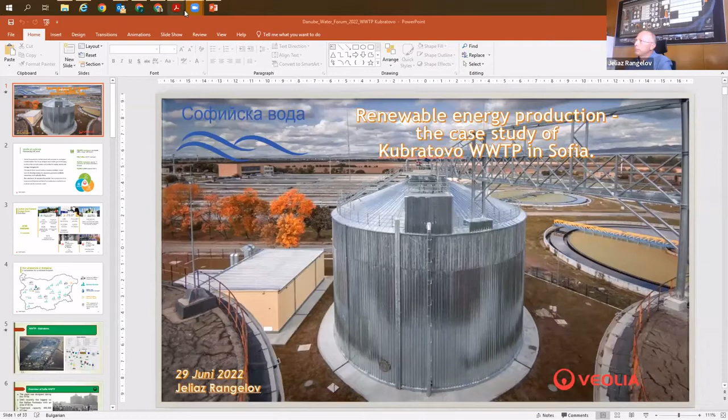So, hello everybody. Is it okay with the screen sharing? Looks good, thanks.

Let me first introduce myself. My name is Jeliaz Rangelov, and I'm working in the field of wastewater collecting and treatment in Sofijska Voda, which is a part of Veolia. I'm working now at Sofijska Voda more than 10 years in this field. I have a lot of slides, but don't worry, I will go briefly through most of them and stay on the important ones.

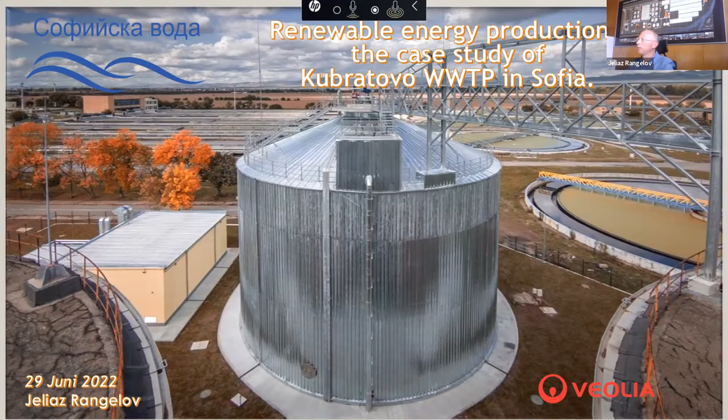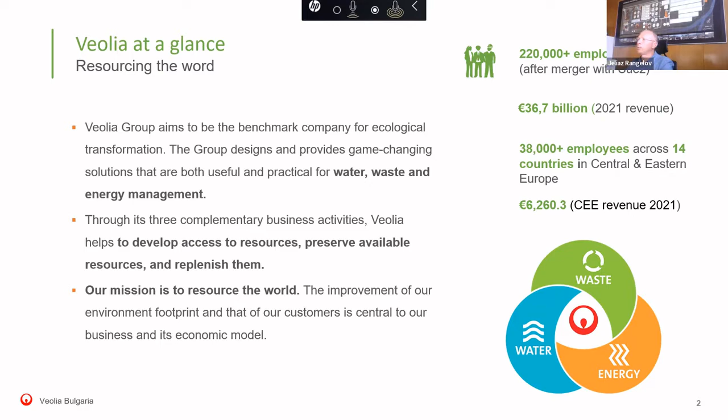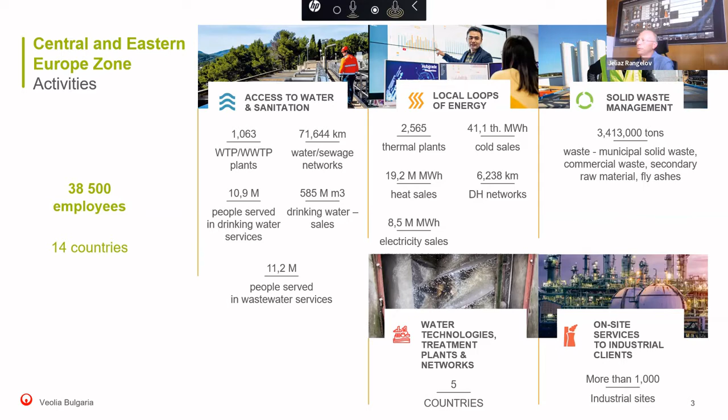First, a brief introduction of Veolia. Veolia is a leading company in the utility sectors, working in the fields of water, waste, and energy management. We have more than 220,000 employees worldwide after the merge with Suez. In the Central and Eastern Europe zone, which Bulgaria is also in, we have business in 14 countries. In Bulgaria, we have technical services in smaller cities, a heating company in Varna on the Black Sea, and the municipal water and wastewater in Sofia, which is the main and biggest business of all in Bulgaria.

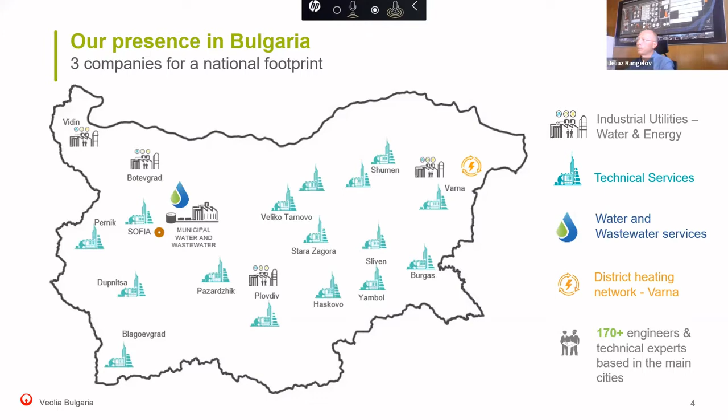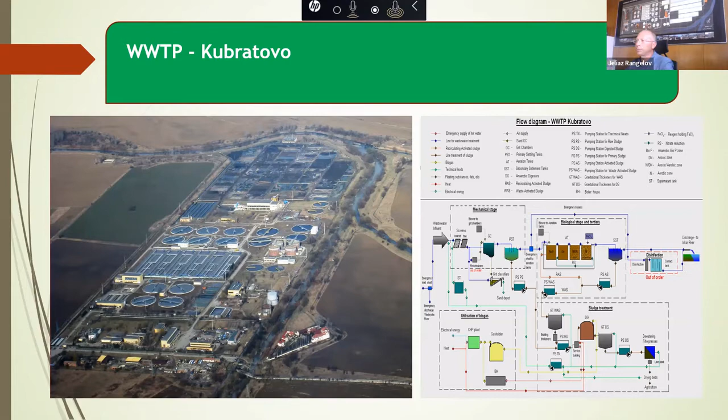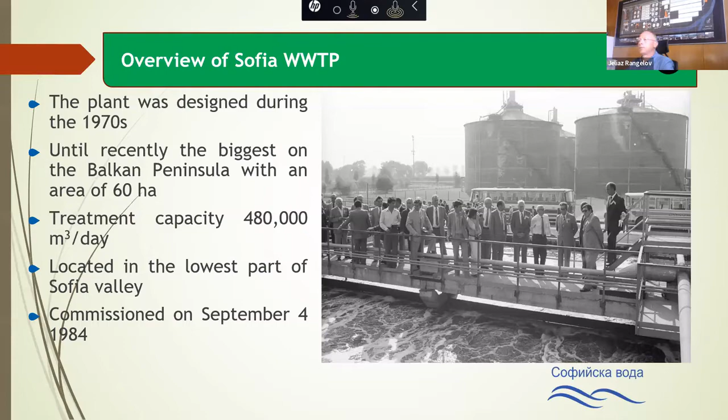Let me introduce the Kubratovo wastewater treatment plant. This is how the plant looks like. It was designed during the 1970s, and until recently it was the biggest on the Balkan Peninsula. Now the plant of Bucharest is bigger than Sofia's, but it's also part of Veolia Water. The treatment capacity of the plant is about 480,000 cubics per day, and it's located in the lowest part of Sofia Valley. This is very important because all the sewage system of Sofia is by gravity, and the water is flowing through the plant also by gravity - we don't have a pumping station. The plant was commissioned in 1984.

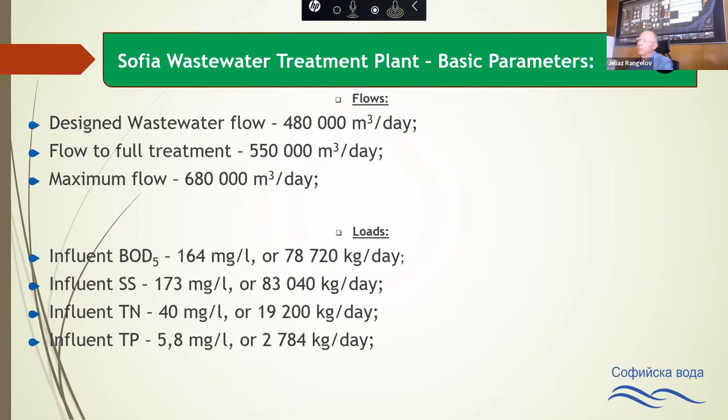These are the flow parameters. We can treat a maximum flow of 680,000 cubics per day, and these are the loads for the most important pollutions.

We had a lot of reconstructions over the years on the plant, from 1996 to 1999 we had a project for reconstruction of the sludge treatment facilities. 2002 till 2004 was a reconstruction of the water treatment line. In 2006, a very important year, we finished the reconstruction of the sludge treatment facilities and started operation of our digesters. In 2009, we installed the CHP plant. 2010 to 2011, we reconstructed the biological line again and implemented the third stage of treatment, so we also treat nitrogen and phosphorus. In 2019-2020, we built a fifth digester - it was the biggest project of Sofijska Voda done for this year.

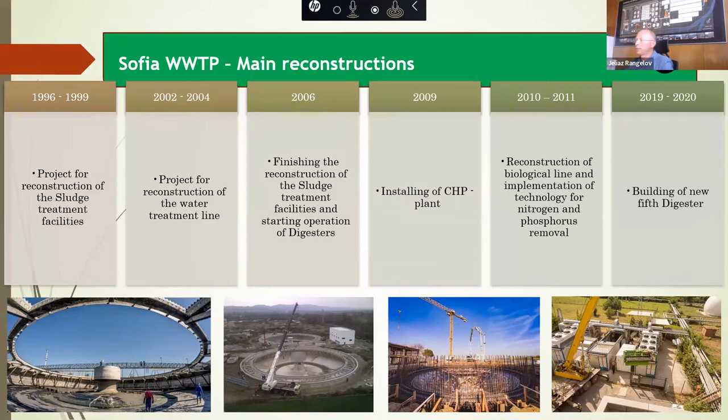We have, of course, a SCADA system, and this is how the SCADA of Kubratovo looks like.

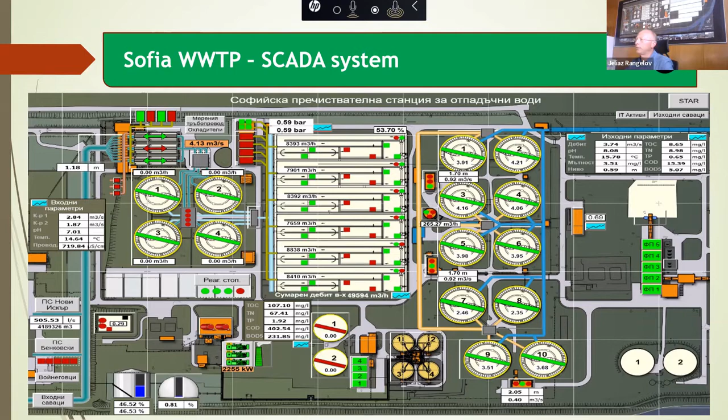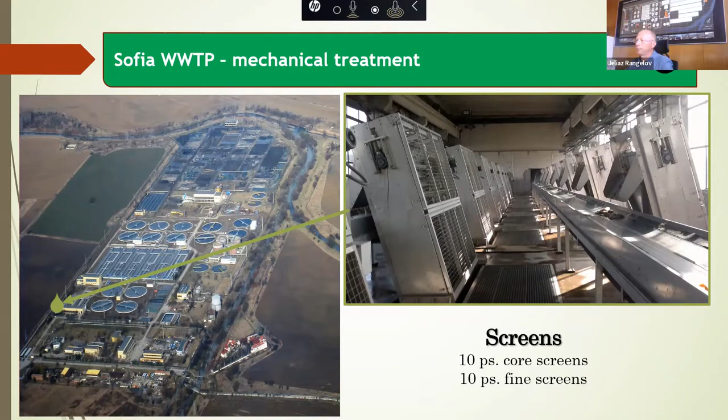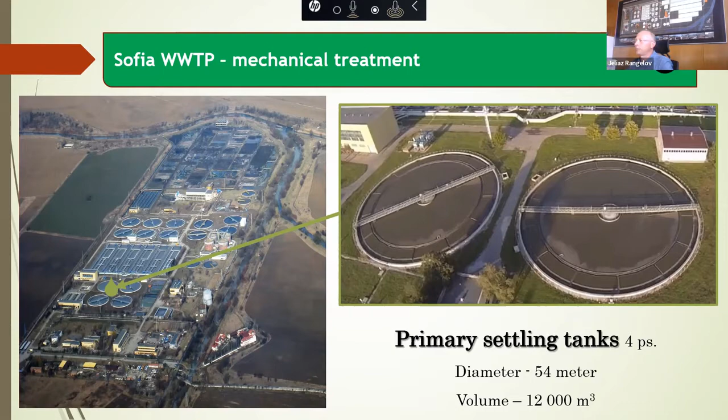A brief introduction of all the equipment in the plant. We have 10 channels with 10 coarse and fine screens. Then the water goes to sand and grease removal - we have 3 lines for sand removal. After the sand removal, the water goes to primary settling tanks, 4 pieces with a diameter of 54 meters.

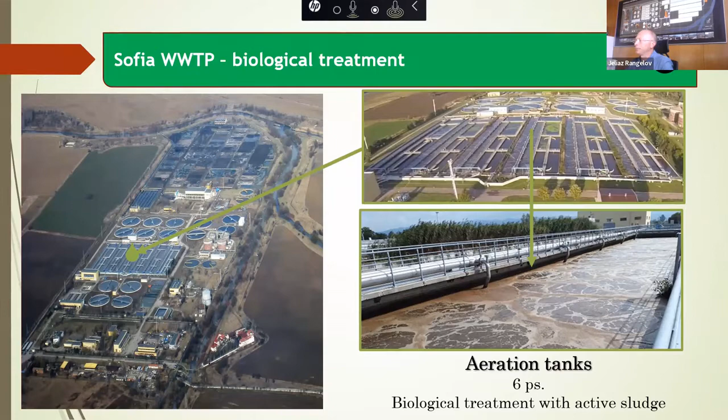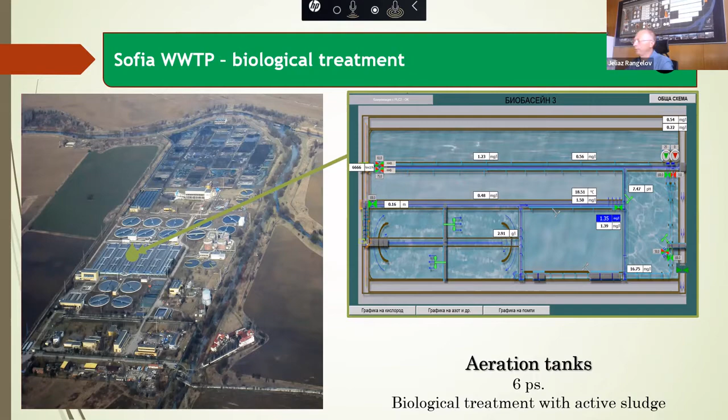After the primary settling tanks, the water goes through the heart of the plant, the biological treatment. We have 6 lines working with activated sludge, with a lot of measurements and automation in the biological step. After the biological treatment, the water flows through 10 secondary settling tanks - the same as the primary settling tanks, just different in number. We have 3 pumping stations for the secondary settling tanks.

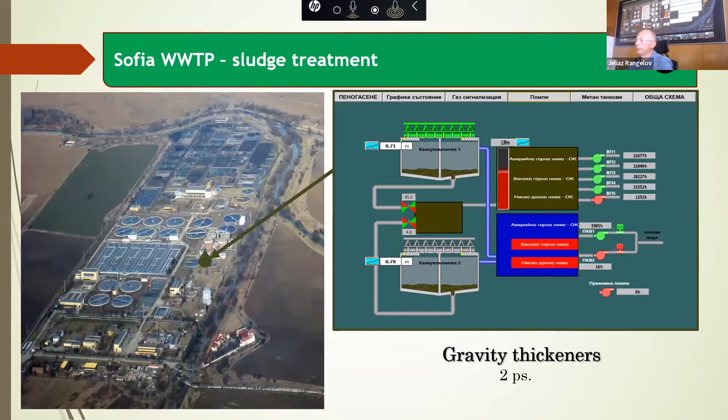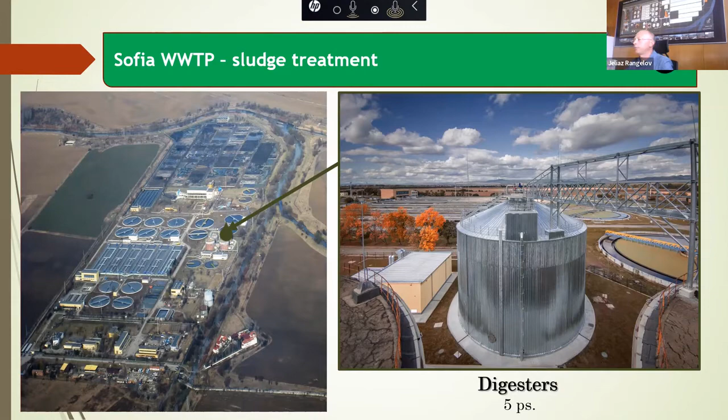This was the water treatment line. We divide the tanks into the water treatment line and the sludge treatment line. The sludge from the primary settling tanks goes directly to the digesters, and the activated sludge goes first to 2 gravity thickeners, then 4 mechanical thickeners, and then the mixed primary sludge and activated sludge goes to 5 digesters.

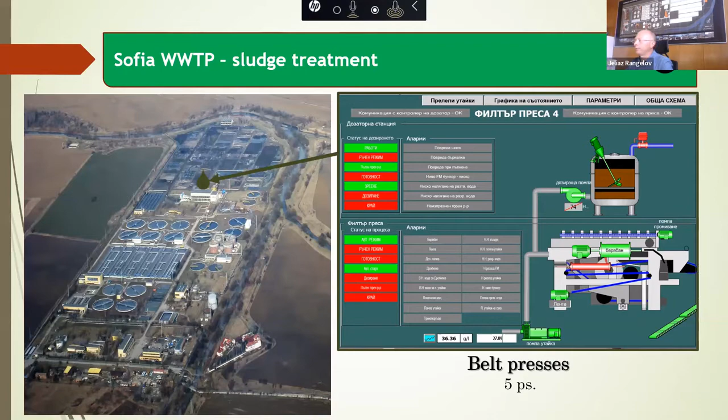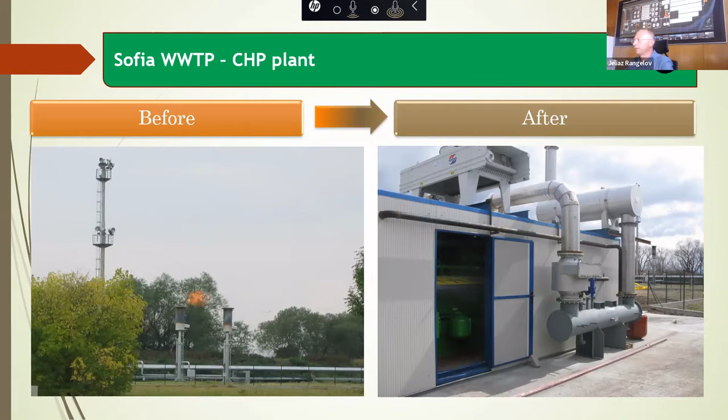The end of the sludge treatment process is the dewatering of the sludge - we have 5 belt presses. And of course our CHP plant. Before the plant, we had a lot of biogas that we couldn't use in the boilers, so we burned it on the flares. After that, we have our 4 generators.

From 2011, we are very focused on energy efficiency. We did a lot of CapEx projects for increasing our energy production and decreasing the energy consumption of the plant.

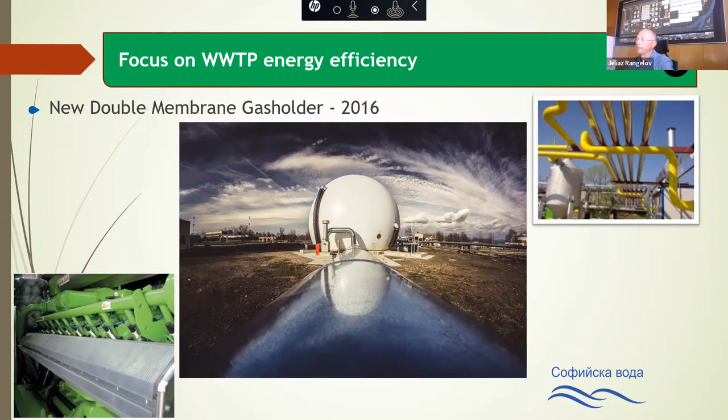In 2016, we installed a new gas holder. The main reason for installing the gas holder was so we could overhaul our existing, bigger gas holder. The useful volume of the new one is about 1,000 cubics, and the pressure inside is about 35 millibars, like the system.

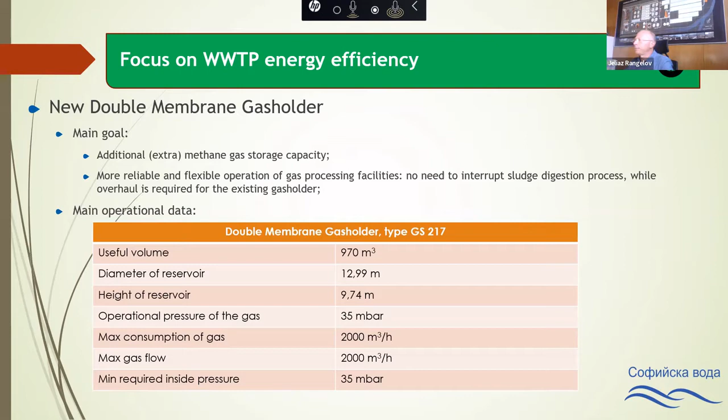In 2017, we installed an additional heat recovery system for the CHP's exhaust gases.

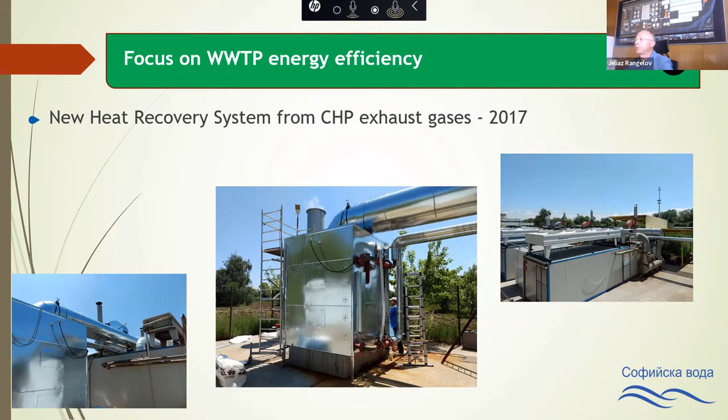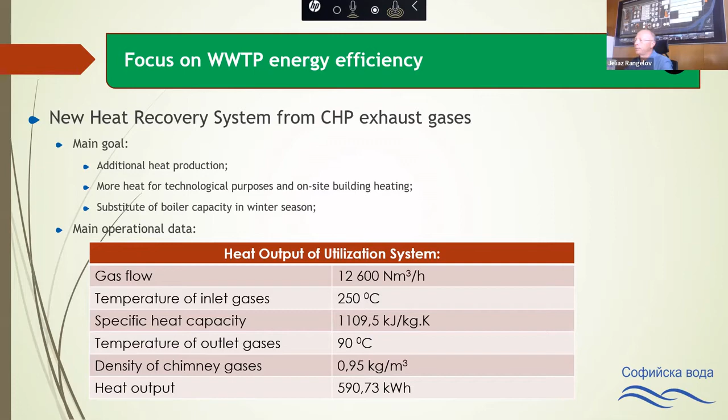The main goal was additional heat production, cooling the gases of the CHPs from 250 degrees Celsius to 90 degrees Celsius. We gained additional about 600 kilowatt hours of heat.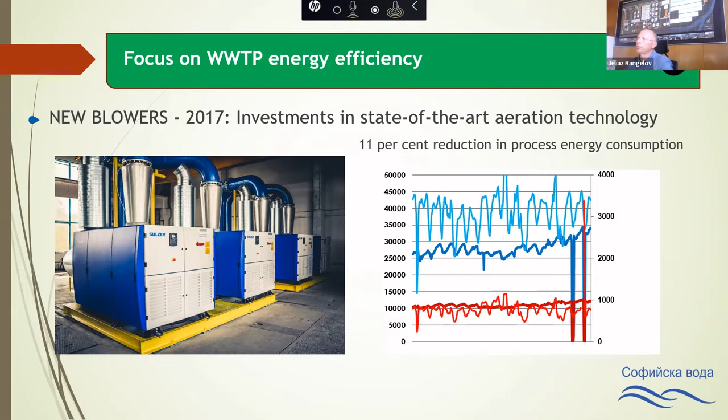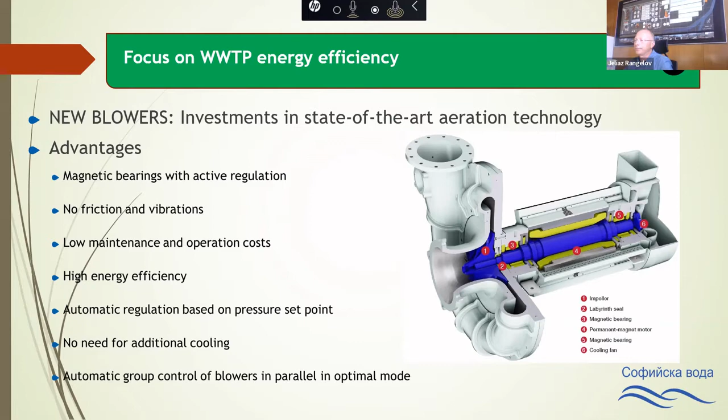In 2017, we installed new blowers for our biological treatment. The blowers in a plant are usually the biggest consumer of electricity, so with the new technology we reduced our energy consumption by 11%. The advantage of the new blowers is that they have magnetic bearings, no vibrations, and very low maintenance and operational costs. For 5 years, we only change the filters for the air. Because of the magnetic bearings, they have very high energy efficiency and no need for additional cooling.

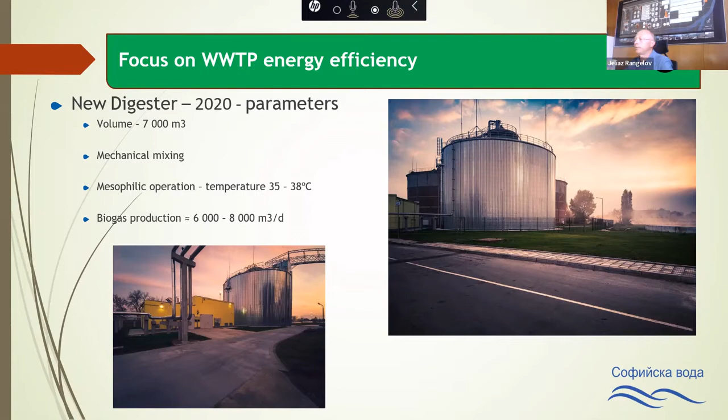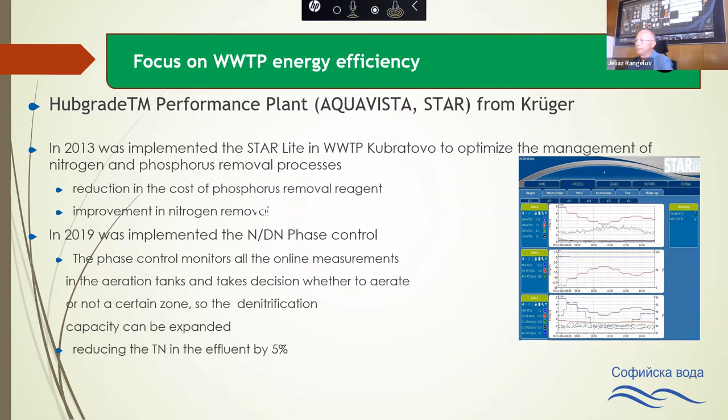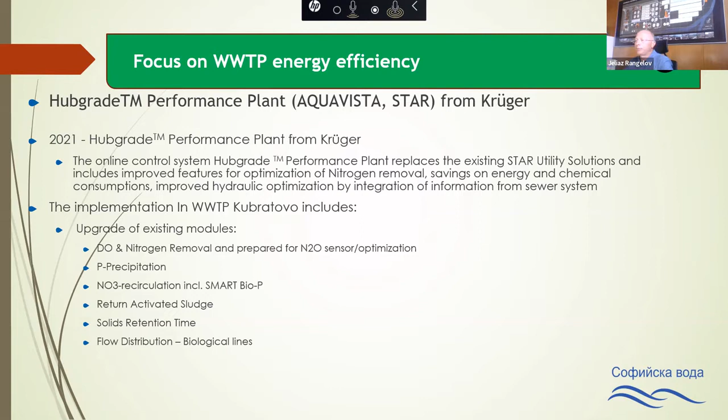In 2021, we will upgrade the STAR system to a Hubgrade Performance Plant. This will operate from the cloud, and we will implement more modules than we have now, including return activated sludge, solid retention time, and flow distribution to the biological lines.

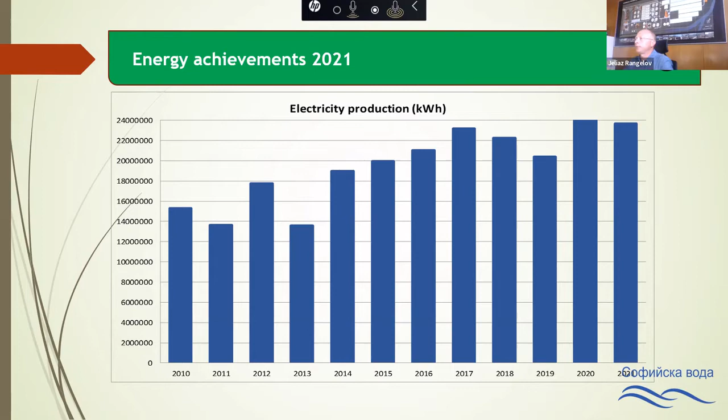This graph shows the electricity production from 2010. We started producing energy at the end of 2009, so the real start was 2010. We can see the trend that mostly every year we have an increase in electricity production, because of technological optimizations and implementing more electricity-efficient equipment.

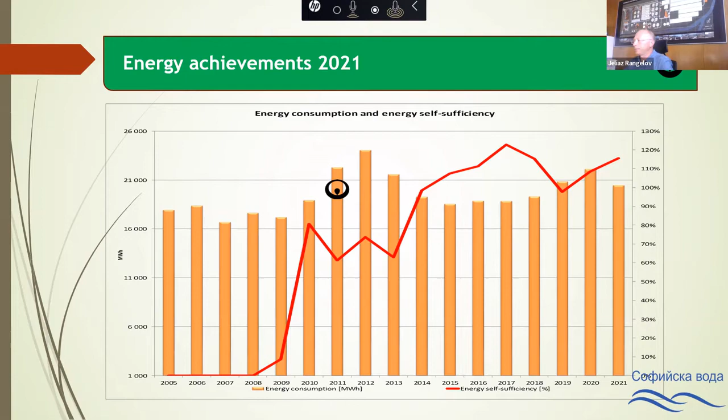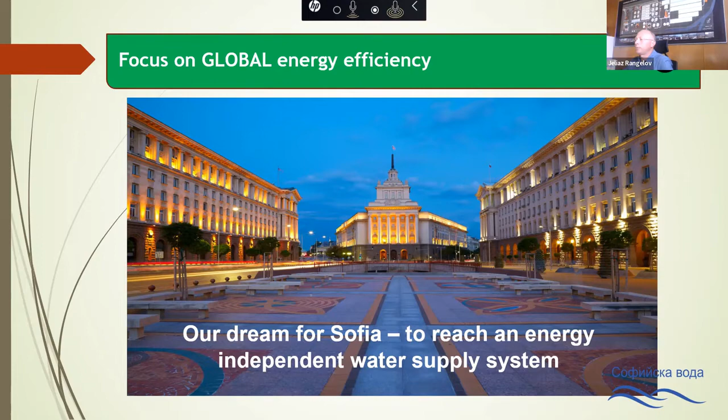But our dream now is to reach an energy independent water supply system. As we've seen, it's no longer a dream to have wastewater plants that are self-sufficient. It's also possible to have an energy positive water cycle, and we can make this well known so it becomes the norm within the Veolia group that every water cycle will sooner or later be energy self-sufficient.

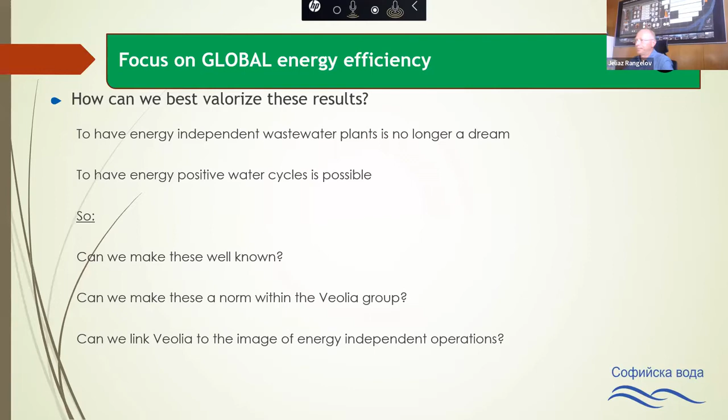So thank you for your attention.

Thank you, Katja, for your introduction. Dear colleagues, energy is the topic that was catapulted onto the agenda of almost every utility, every enterprise, municipality, province, country. Next I will share with you some aspects on how Vienna Water is treating this issue.

First, I will start with a short introduction of our system. You see the city of Vienna, the red spot, is supplied mainly by two transport lines conducting the spring water by gravity into the city. The first so-called spring water main was put into service in 1873 with a length of 150 kilometers. The second spring water main has a length of 180 kilometers and was put into service in 1910.

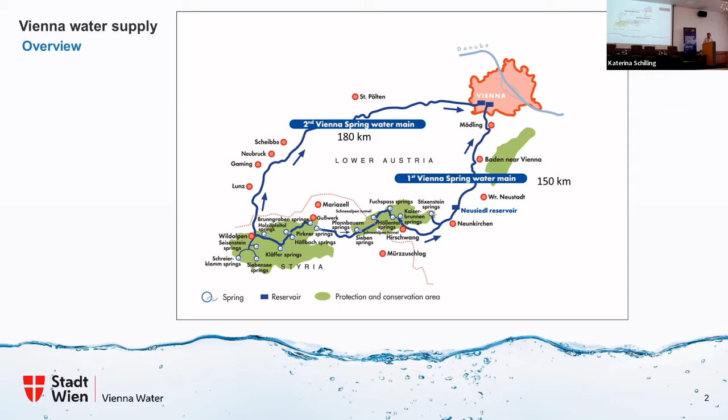Some characteristic values: we have 1.9 million inhabitants in Vienna. The water demand is about 390,000 cubic meters per day, ranging from 300 to 520, meaning an annual consumption of 143 million cubic meters. There are 99 catchments, springs and wells. Spring water covers about 95% of the demand, and well water about 5%. There are 31 water reservoirs with a total storage capacity of 1.6 million cubic meters, corresponding to about 4 times the average daily consumption.

There are 26 pumping stations, about 3,000 kilometers of pipe network. We could reduce losses to 7%. There are 103,000 house connections. We have 570 employees, but that's just drinking water, working in 3 provinces. As we saw before, the water comes from Lower Austria and Styria. The tariff is 2.02 euro per cubic meter for drinking water and 2.22 euro for sewage water. In total, we have 16 drinking water power plants.

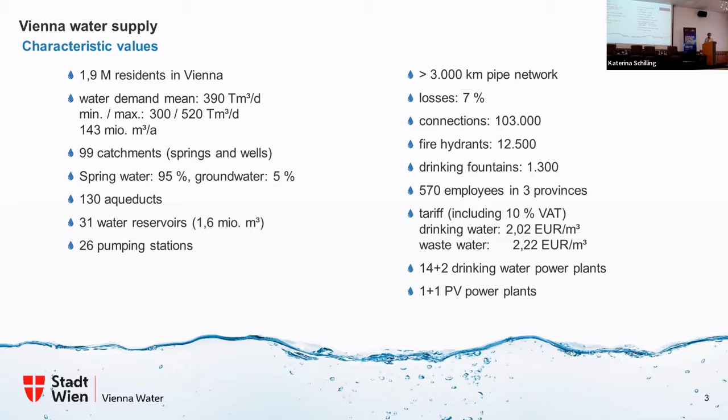14 facilities are operated by ourselves and 2 are operated by the municipal electricity company. The same with photovoltaic power plants: 1 small one is operated by ourselves and 1 by the municipal electricity company.

Just some aspects, a gallery within one of the mains and an aqueduct.

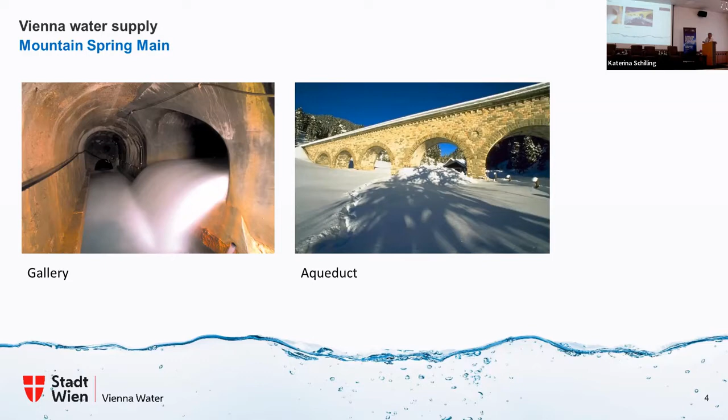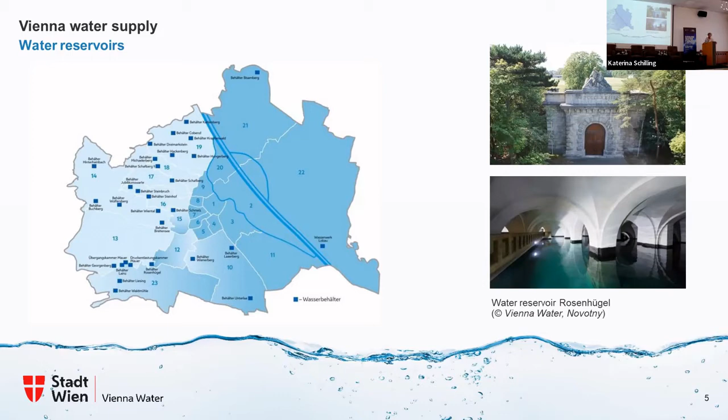150 years old now. Here you see a situation of the reservoirs. They're all situated mainly on the hilly side, on the hilly west side of Vienna, and on the flat part there's almost no reservoir. Here is the photo of one of the oldest reservoirs where the first spring water main is discharged into.

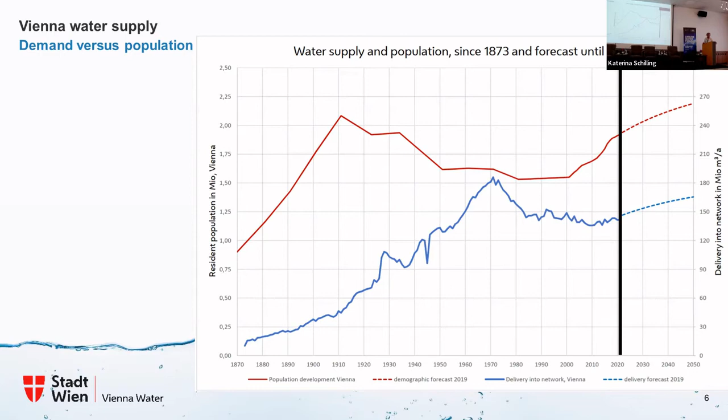Maybe you've heard the words of a certain Mrs. G. Thunberg. She said, "Our house is on fire." And with this, she's absolutely right.

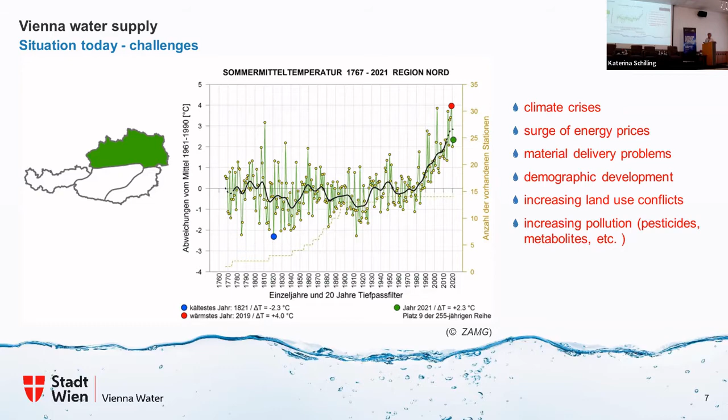How's the situation in Vienna? On the consumption side, we need a total of 24 gigawatt hours per year. This is composed of about 20 gigawatt hours electricity, 4.5 gigawatt hours for other energies from fossil sources, that's for fuel, heating, etc., and other renewable energies, that's 0.3 gigawatt hours, not much, mainly wood for heating service.

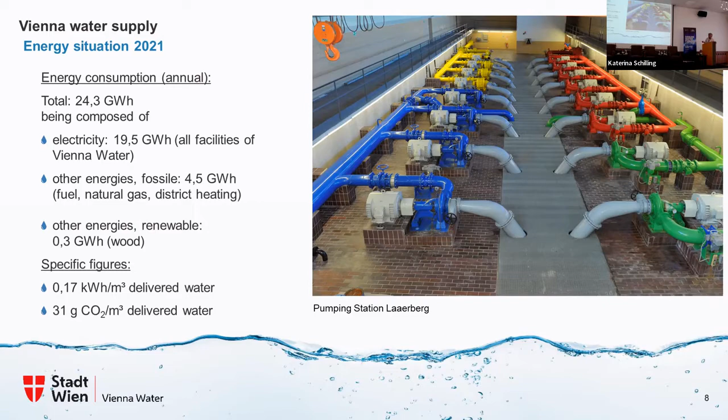Some specific figures: there's a need for each cubic meter of delivered water, we have to put in 0.17 kilowatt hours of energy, but that includes pumping, fuel for mobility and so on, so everything is included in this value. And we produce or emit a value of 31 grams carbon dioxide per 1,000 liters of water. You see a pumping station, one of the 26 in Vienna.

Now we look at the other side, the production. There are 16 hydroelectric power plants driven by drinking water. This happens in the catchment areas along the transport lines, and also 3 within the city. The oldest one is from 1912, and they range from 50 kilowatts, very small, up to the largest one at 5 megawatts. The annual production is 63 gigawatt hours per year, so that's 2.5 times the consumption we have.

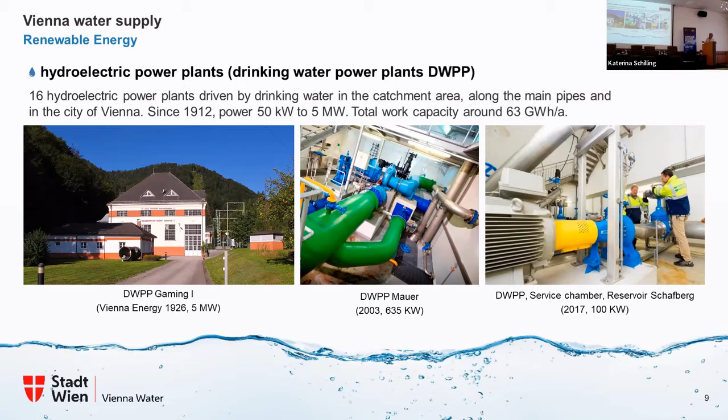Here you see some photos of how they look: there's a small one with only 100 kilowatts, a 600 kilowatt one, and the 5 megawatt one.

Actually, we have 2 possibilities. If we have the necessity to reduce pressure, we can reduce it by valves, like Clayton valves or globe valves, converting the energy into heat, or we use it for energy production. So we have the opportunity to use Francis turbines or Pelton turbines, or the cheapest way is just to use a pump, letting it run the other way around. This is very cheap.

If you always have the same height and the same discharge, it's almost the same efficiency, because the Francis turbine is used for different heights of level, or Kaplan you would need if you also vary the discharge. But if the conditions are rather stable, a pump also does very well. This is called pump as turbine.

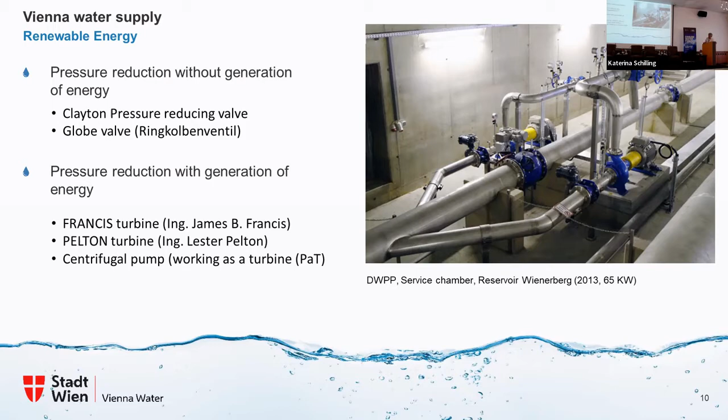With respect to wind power, there's a problem in Austria, as we have provinces that really don't like wind power. We made an overlay of all our plots, and there is no single plot or terrain in our property where we could make wind power. So this is still work for the provinces to allow the erection of wind power. This is not possible for now, but another possibility is solar power.

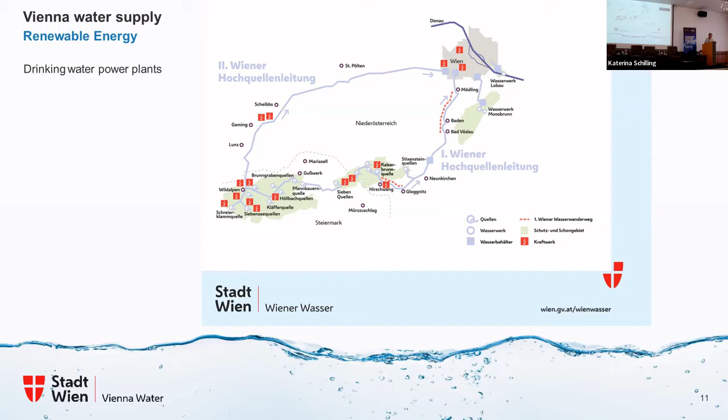A small one of only 6 kilowatts we operate by ourselves. And here is the first large one with 2 megawatts constructed on a large reservoir. Here we generate 2 gigawatt hours per year, and with this one plant alone, that's 10% of our total electricity demand, or about 8% of total energy demand.

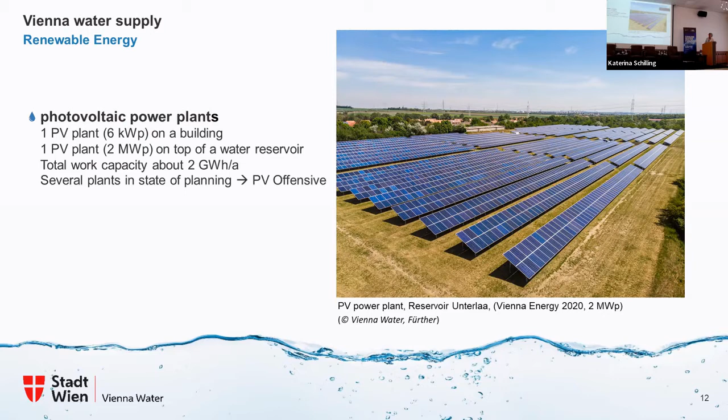This was the first plant made in the so-called PV offensive of the city of Vienna. I will show you the plan here. That's a strategy of the city: starting from the 50 megawatts now installed in the city, to reach 250 megawatt peak in the next 4 years, and 800 megawatt peak by 2030.

Only on the plots owned by the municipality, the city wants to build 50 megawatts in the next 4 years. That's the strategy of the city. And as we, as Waterworks, are part of the municipal administration, we are of course also in the boat.

As a first step, we have offered an area of 150,000 square meters in our property to dedicate for photovoltaic plants. This corresponds to a possible power of 15 megawatt peak, but that's only within the limits of Vienna. We have many plots outside of the city too, so at least the same amount of power potential there.

It is planned to reach this in the next 4 years. In order to take advantage of synergies, we don't build it ourselves; the municipal electricity company builds, maintains, and operates these plants. We only provide the space, and they handle the operation of the power plants.

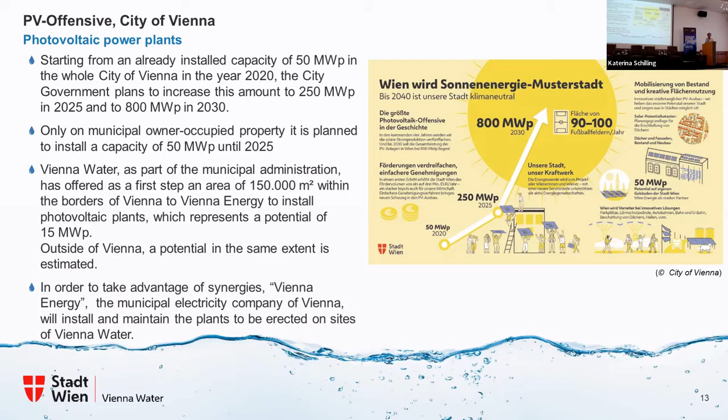Just a short step to financing. This is done also by the electricity company, but there are so-called citizens' power plants offered. Private people can buy a fictive share of solar panels of 300 watt peak each, at a price of 250 euros, and over 5 years they get their money back depending on the production of the solar power plant.

There's a guaranteed production of 300 kilowatt hours per year, and with the estimated production of 315 kilowatt hours, this amounts to a yearly payment of 53 euros. That means an internal rate of return of 2.51% for the people.

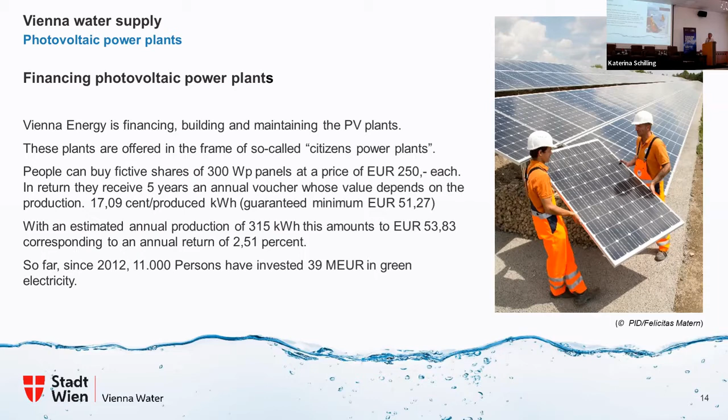This has been running for some years, and the same model was also possible for wind power projects. Up to now, about 11,000 people have invested an amount of 39 million euros in this form of green electricity.

We are also working on the mobility sector. We have a fleet of about 150 cars, and for the past 2 years we have had a procedure: every time a car needs to be replaced, we check whether there's a car on the market available which covers the necessities we have, because trucks and tractors are not really available as electric options.

Up to now we have 7 cars running on electric energy, and we are still working on this to reduce the use of fossil fuels.

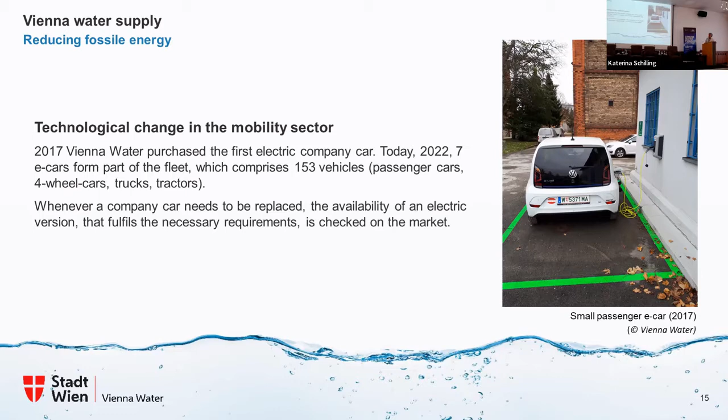Another aspect is to reduce the electricity needed for air conditioning. On our headquarters, we have installed a green facade, and we have had an evaluation made by 2 universities. The result is that we can reduce summer temperatures within the building by about 3 degrees Celsius. This is better for the people working there, and also for the cost of energy we need.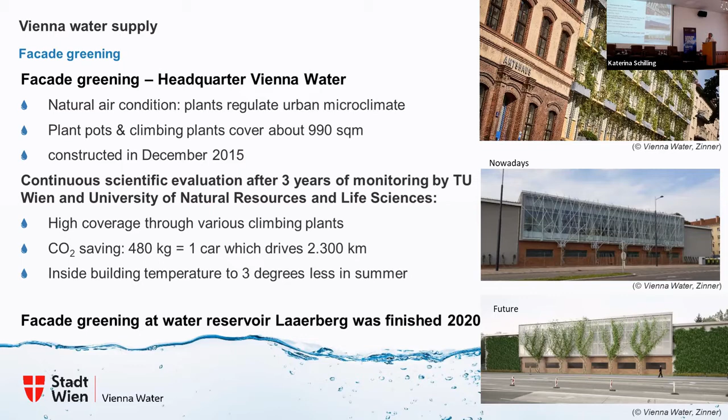This was on the headquarters, and there's another one that's new - that's an image photo on the control center of a reservoir, which was made in the year 2020.

Well, that's my presentation. So for questions, I'm available in the panel. Thank you for your attention.

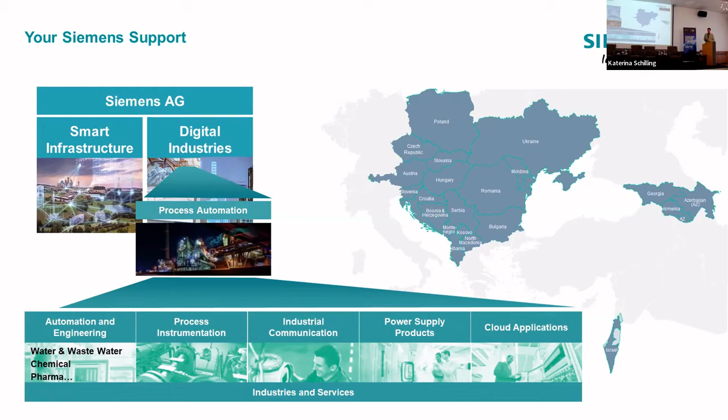Within automation, this whole portfolio of automation, of instruments, power supplies, up to cloud applications, is our target to make available for solutions in water as well as other areas like pharma, food and beverage. Being really close to the branch is what very much conducts our business at the moment and for the next oncoming years.

This would give you a picture of how a company like Siemens would look at a project, which could be energy management or which could be automation.

I'm responsible for something called vertical water and environment. This means exactly to vertically integrate solutions from field level, like measuring, like drives, like communication, up to management level - so SCADA system monitoring - automating to a large extent and making things transparent, visible and working.

Now there is a strong crisis, it has been said many times, and it is pushing things. There is a strong move from our customers towards level management and engineering in the way of digitalization, in the way of connecting all parts of the system, predicting, and optimizing. I hope we are up to meeting your requests. We at least want to push and apply, and I hope I can show you some examples.

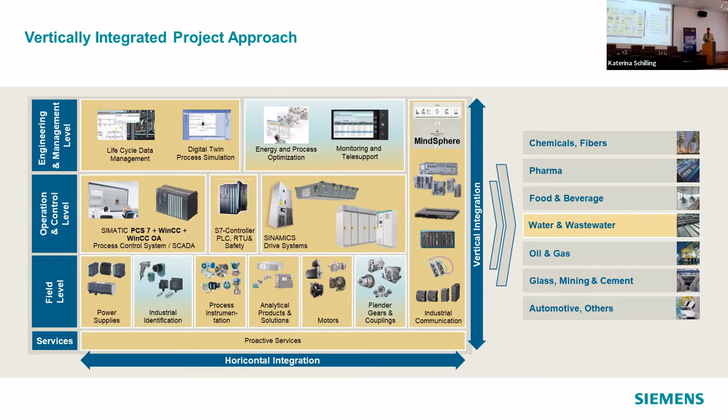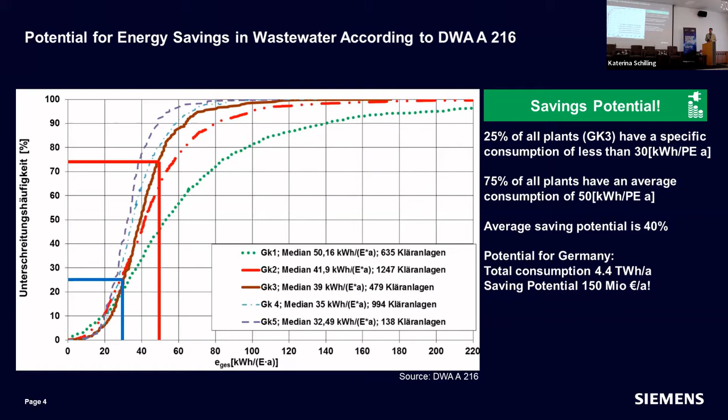No matter if this is really right for your region or your country, if you calculate the total of this savings potential - and this has been said in previous sections many times - there's a huge amount of saving possible. Still, there's of course a way of how to do it, and I'm wondering if you are surprised: this is not a technical question to start with, but is actually really a process, interaction, and also social related question.

What we see at projects is that success factors concerning transparency are the most important. If you really have transparency on where your energy users or consumers are, how the complete process works - balancing, looking at complete processes as well as single utilities - you need to look at the whole process. This is not a matter of software or money, it's just a matter of approach.

Identify weak points. Is there maybe low maintenance on your blowers in the wastewater treatment plant? Do your pumps run not at optimal set point? Do we have a deviation from the baseline when comparing utilities or features? If you contextualize, if you really compare your system, after being transparent, to other systems in place, it's actually a very clear path on how to proceed. Again, this is not technology - this is a way of analysis and a way of doing things right.

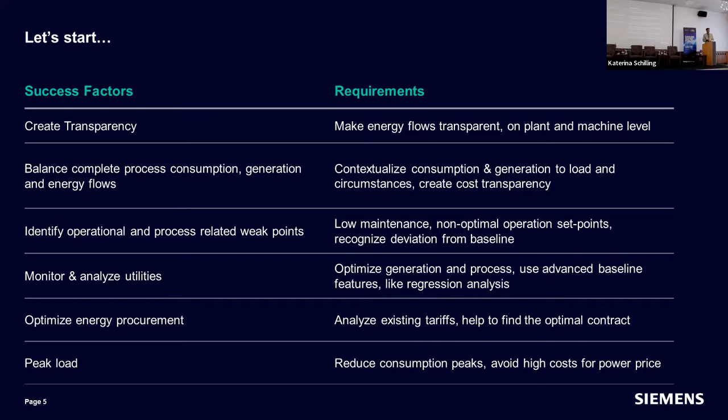Peak load, of course, is part of the game. If great consumers like us in water can reduce peak, or produce or use energy when others are not, then we are a great part of stability in the system. And of course, ever more coming up is the question of procurement - buying energy at reduced tariffs whenever this is possible.

A matter of transparency is actually to make things simple - to reduce complexity, as we've said many times, and therefore so-called energy KPIs can help a lot - process indicators. This is one example, for a pre-treatment, mechanical treatment process station, where you can see: where to implement energy meters, where to look at specific consumption, and then relate this to inhabitants, or the plant layout. Then you have a simple factor which you can follow up, put into diagrams, and follow historically and also predict later on.

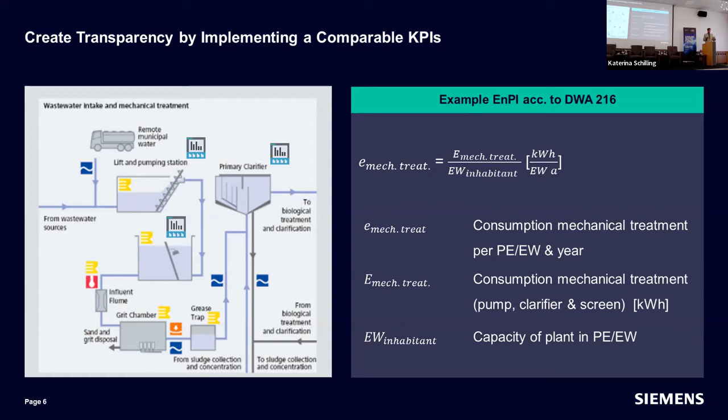This would be, for example, a process with a software tool of ours, Energy Manager Pro, where you can very quickly and intuitively display this data, to create visibility, to show things to the operating people. It's actually a matter of connecting with people and understanding what they can do for the whole process.

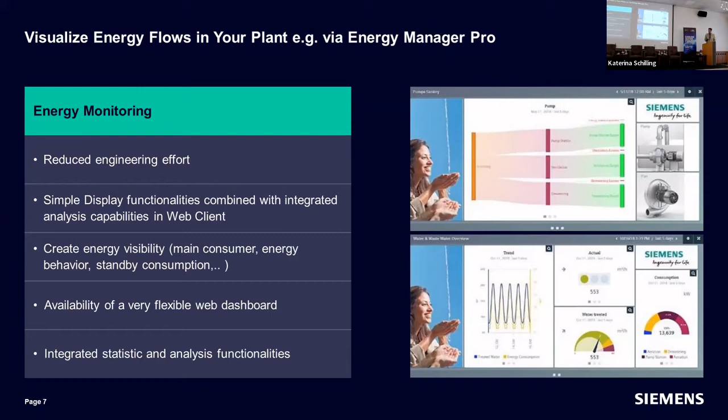And finally, such a software will be of best use where you can communicate right, where you can measure right in the first way, and then make this available to people. To show or analyze and monitor such energy consumptions, there are several simple calculation methods like regression. Make an attempt to make yourself aware of what is the optimum of what could be expected, and then compare to status, and you will be aware of where the problems are.

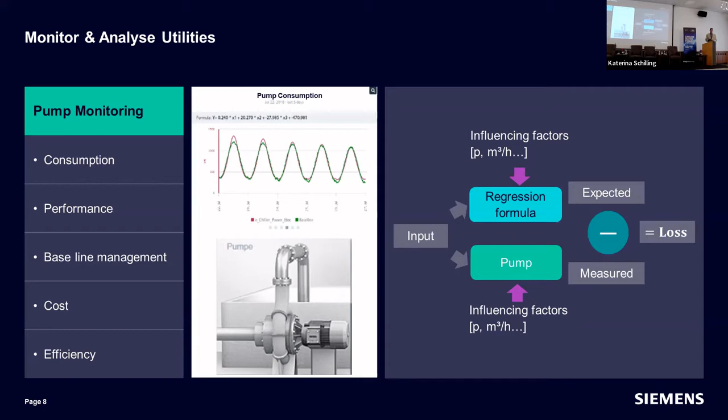Finally, I want to show some examples which are maybe a little different to what I've said. Our colleagues have conducted a project at the Vienna water treatment plant, which is apparently the third biggest in Europe, 4 million people equivalent, where sludge was before this project incinerated at the company next door. With this project, sludge digestion came into place, of course, under full operation. It's the only wastewater treatment plant of Vienna, so a task for us was to do this under full operation, the change of system, the change of automation and the SCADA system.

There was also simulation in place. We prepared software, we prepared measurement, we prepared automation, simulated, and then in certain packages transferred to real. Never needed to go back. So for automation, this can be a helpful task to conduct such processes. And like the example from Bulgaria, the Vienna water treatment plant is by now energy autark, even more, 110%, not every month, but across the year the energy balance is positive.

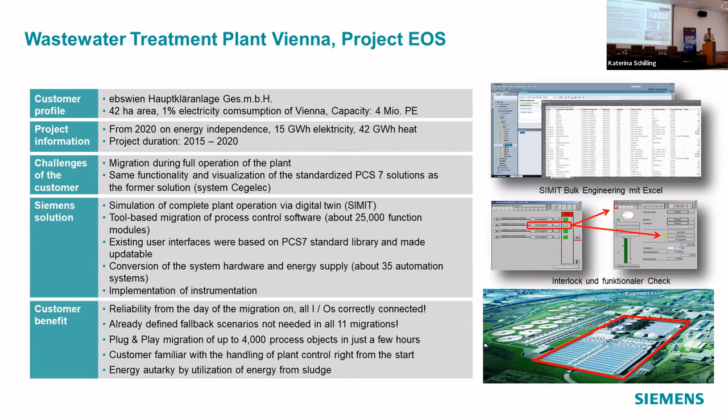Something from far away, but always look onto best practice. The Singapore Public Utilities Board actually operates 3 different municipal wastewater treatment plants and 1 industrial one. There is the target to reuse treated wastewater again for industry, and the approach to completely conduct a process of energy management for all of these plants. So they have all been connected, all the processes via the system Energy Manager Pro, and we see a major reduction of energy cost and energy consumption.

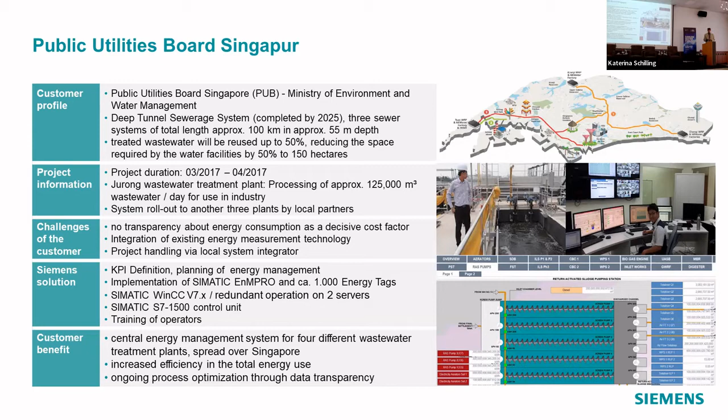And of course, I would also like to show that this is not only true for big cities. I think this region, Southeastern Europe, is especially well prepared for making a big step towards trying out new technology. So we are requested, this has even been in the tender document, mind you, to prepare a dynamic process model for a wastewater treatment plant in Eastern Croatia, Southern Slavonia, for online simulating the wastewater treatment process, and not only that, to create an operator support model from this.

This needs to be directly connected to the operators and giving them advice: okay, start your blowers now, reduce your pumping now. The process is in good shape, the process is in bad shape. There is also a tool in place. Siemens turns into a data company more and more, step by step, to really install quickly such models, also to help engineering and to finally get this right through to operating people.

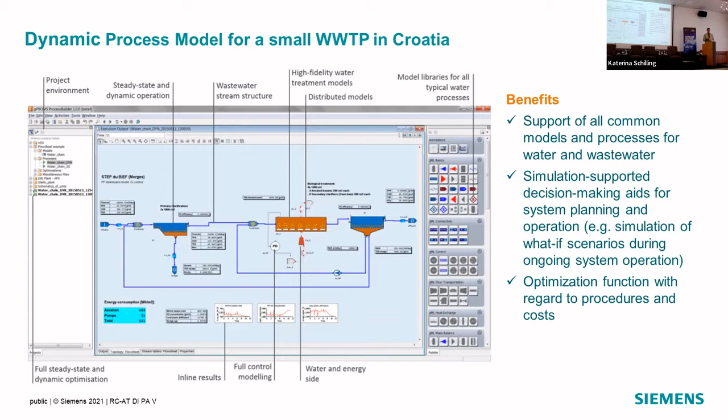Yes, finally, our conclusions. If you look at energy management projects, take care about measuring the right values, the values right and continuous. It's a matter of really having things transparent and continuously evaluating the history of data, add intelligence, add knowledge to data, make it simple. There is no need to be very complicated. There is a lot of need to be simple and transparent, to be understood by people.

Create easy transparency, so pictures or software is actually best in place where we can picture, where we can visualize dependencies, where we can visualize histories of data. Connect to people. Never forget that this is the most important factor. These technologies can also only serve people, not the other way around.

Finally, a very simple process would be interesting to get in place, which means measure, monitor, control, and finally manage. And this is a point which Mr. Kling and myself just said before this session. So if today can be a starting point for you to really step into projects and do things like that, every small step counts. Then I think we are really in this region have a good opportunity to be ahead. Thanks.